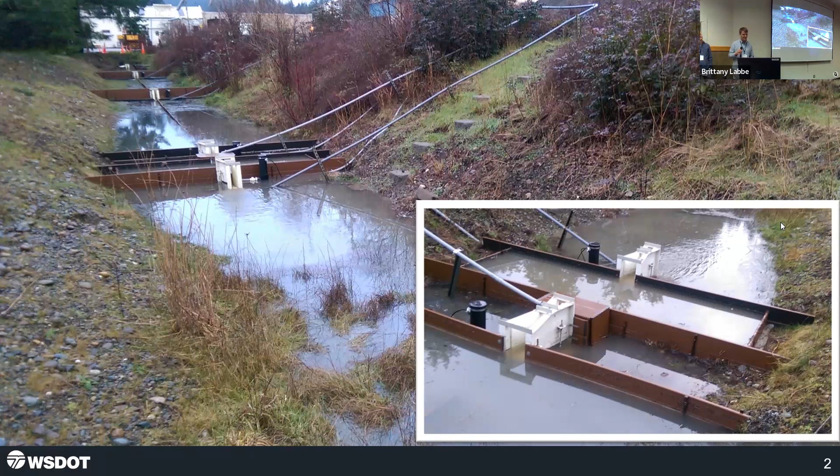This is Fun with Swales. I'm Chris. We're going to kind of talk about the last 7 years of not so much the actual studies, but more the study design and kind of the things we've learned on how to study swales.

So WSDOT was tasked to study bioswales about 7 or so years ago, and we came up with a design, we built it, and we started getting data, and we started learning kind of how the swale operated, how the design was going to operate with our study. And after many lessons learned, this exact same study, which started off looking like this, now looks like this. Same study, but this is ultimately what we ended up having to build to capture the data we needed.

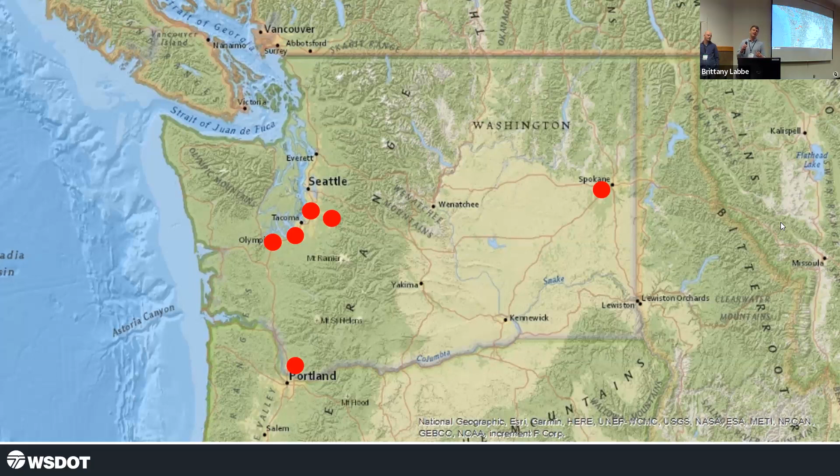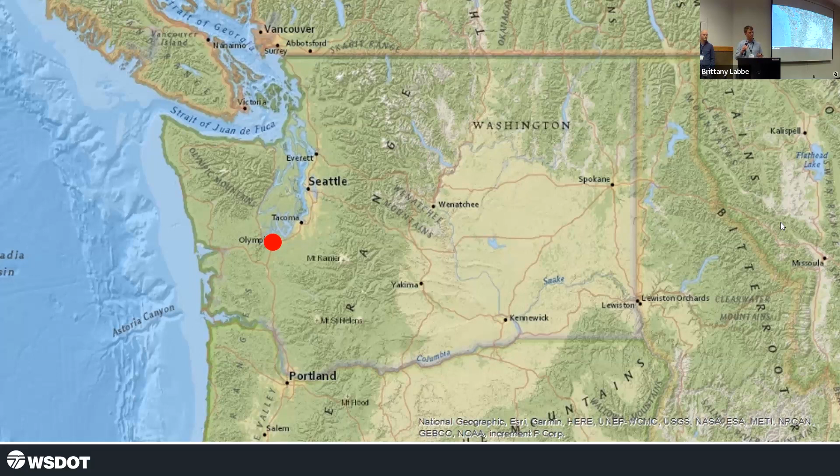So over the next few minutes here, we'll talk about how we got from this to this and the fun and painful lessons we learned. So I'll start off, most of you are probably familiar with this. This is Washington State. The 6 dots there are the swales that we have either current studies on or have had studies on. We're going to focus on this one. This is called Mottman. It's right at our office. So it made it easy to do lots and lots of spot checking, and we could really keep an eye on it.

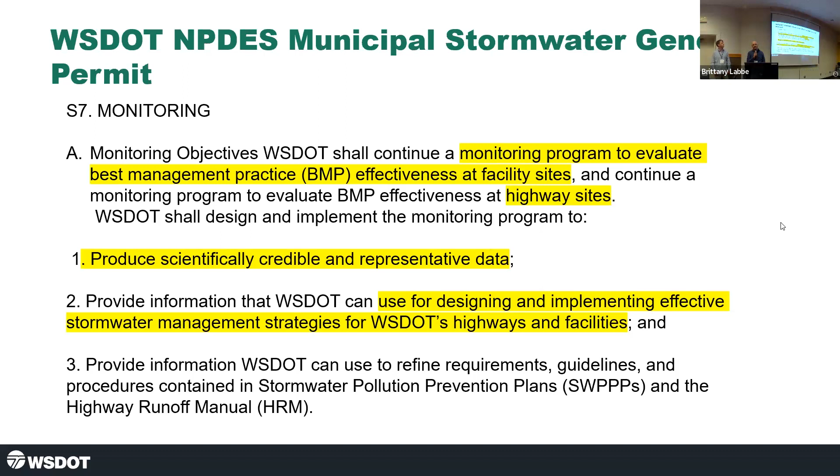So I'll take over. Why do we monitor? Well, because we love stormwater and we love tracking hydrology and creating spreadsheets and all that fun stuff, but also because we have to. WSDOT's permit requires that we have a monitoring program to evaluate BMPs. We want to produce scientifically credible and representative data, and they want to use that in the Highway Runoff Manual if possible. And we go by the TAPE program guidelines.

So these are just our general storms that we would target. We need 0.15 inches of rain, 10 aliquots minimum sample per composite jar. We like to get a dry period of 6 hours or more if we can, and we need to capture 75% of the storm's hydrograph.

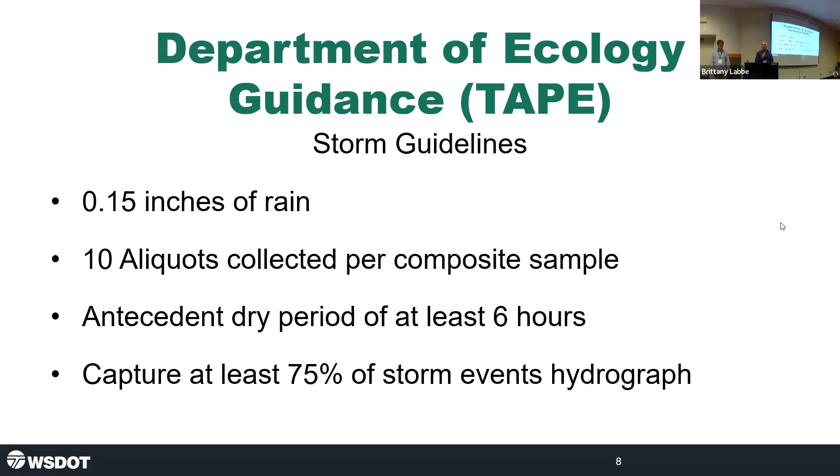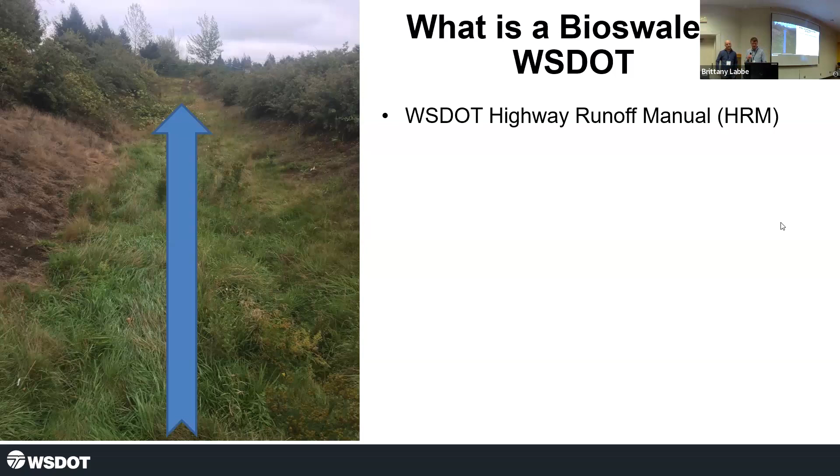Back to me. So what does a bioswale mean to WSDOT? So we go with the Highway Runoff Manual definition. So you're going to have a longitudinal slope of 1.5 to 5, nice gentle slope, max water depth of 2 to 4 inches, and a bed width of 2 feet to 10 feet. Minimum length of 100 feet. There you have a WSDOT bioswale.

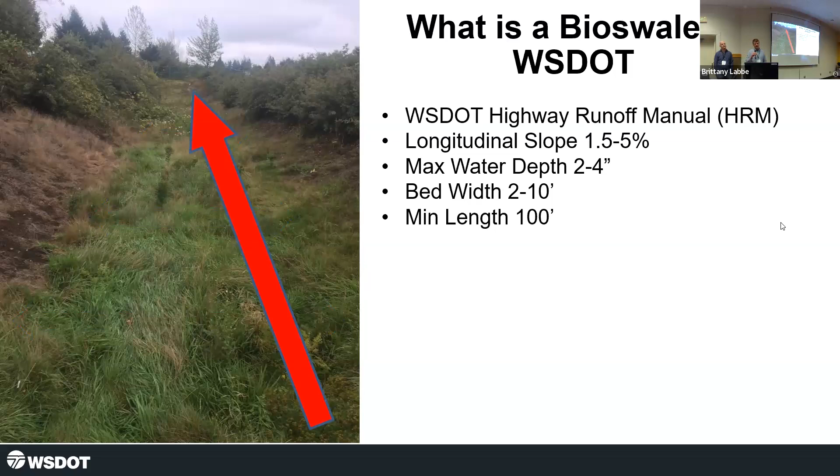To measure our hydraulic information, we use what was called FTS. Between multiple corporate mergers and takeovers of companies, I have no idea what the current company is called, but we use a program called AutoCaller Plus, and it allows us to have telemetry data and download data, so we can actively watch the site as it's sampling. So we can watch the hydrology numbers, and then we get a data download as well to get a really dense data set when reviewing it.

The Ubicom, we actually use that. We can do the same thing. We can get instant results back if we're looking at something that isn't in that hour time frame. If I want storm event information, I don't want to wait, I'm impatient. Or we can actually send information to it. So we can set them up remotely to sample. We can send sampling thresholds and other information to the site that way.

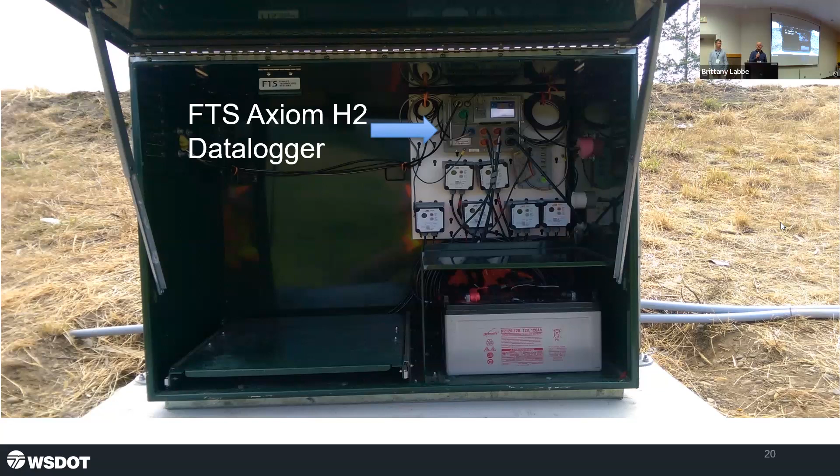It's their Axiom H2 data logger. You got the battery, go back a second. You got the battery in there, all kinds of different connections to some equipment that we actually don't even use anymore. So as we were saying, this is the original swale design.

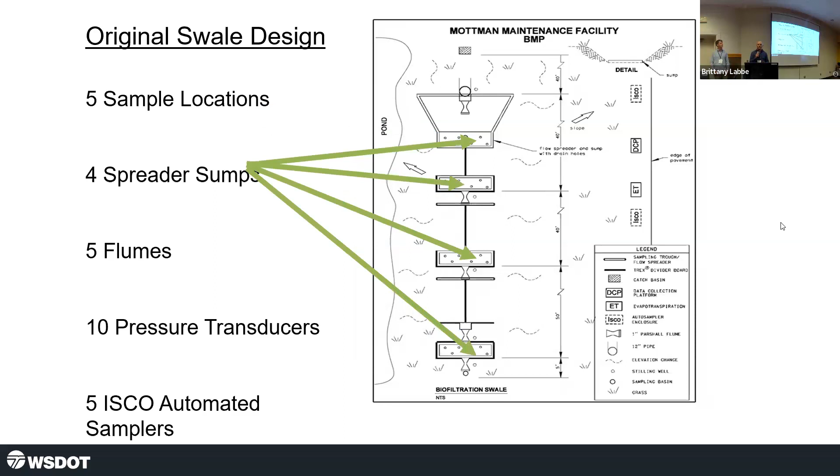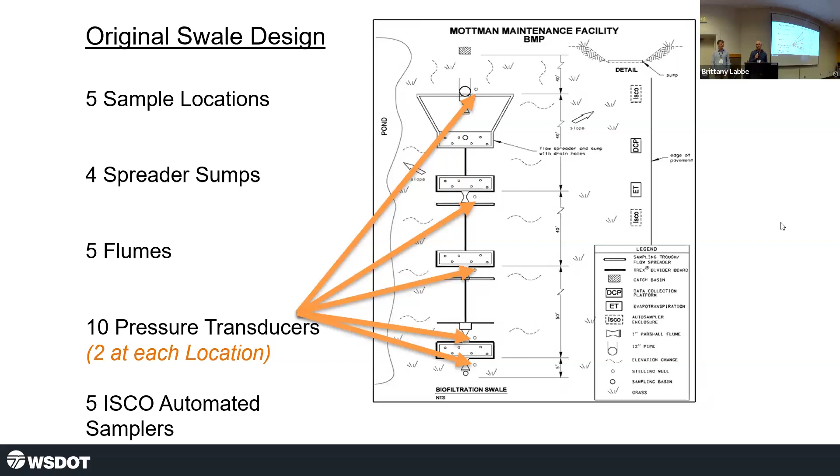And so it had 5 sample locations from the influent all throughout the swale. At each of those locations in front of the flumes were spreader sumps. And then there you have the 5 flumes. And then for the stage measurement at each location, there were 2 pressure transducers, so 10 total. And then each station also had an ISCO automated sampler. So as you can see, that's a lot of stuff going on there.

And for sampling purposes, that could cause problems where any of these things might go wrong at one time, and then it kind of ruins your event. Maybe you'll get the first and third sample location, but there was something wrong with the PTs reading incorrectly at the second. So we kind of had to figure out a better way to do things.

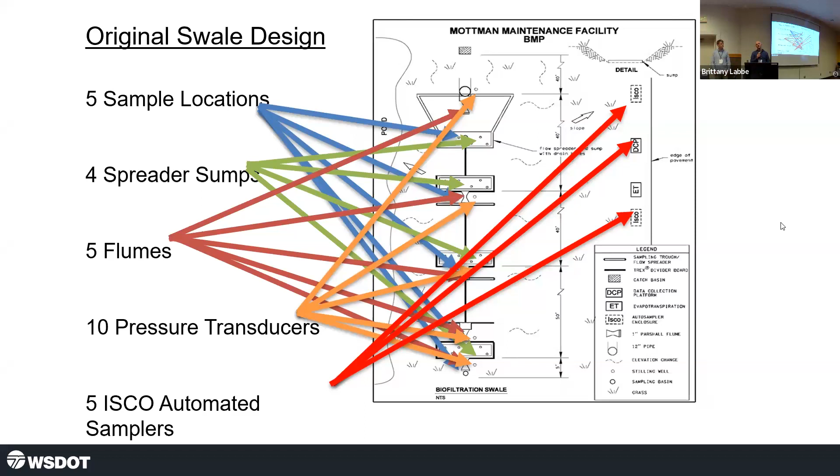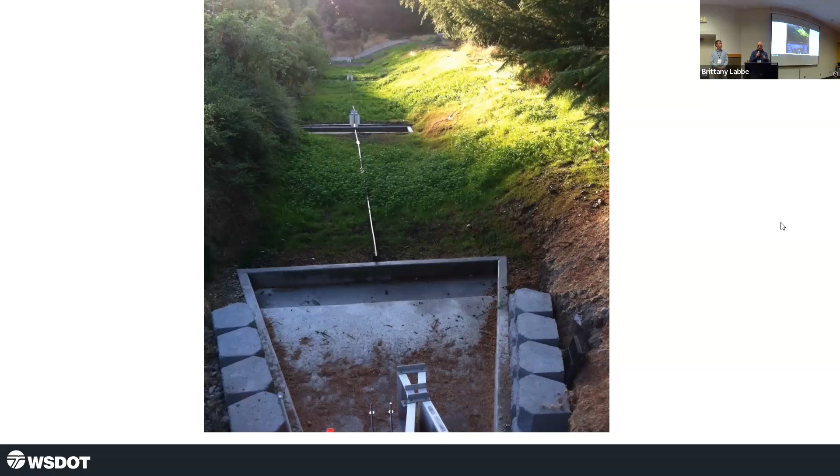So this is a beautiful picture of the original site. As you can see, this is looking down from the influent there. You can see all the little spreader sumps down through the end there. And this is what it looked like, as Chris said, after the first event. So yeah, we got it all set up and we're like, great. And then the first event comes and we look at the swale and we're like, that doesn't look like a swale anymore.

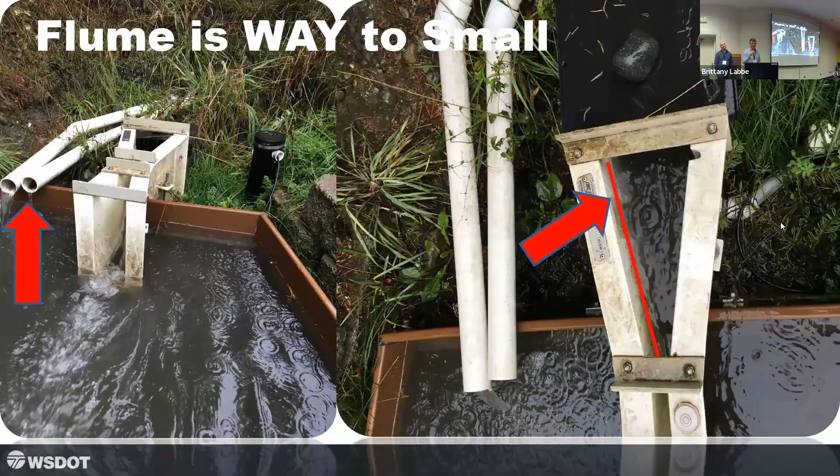So the first thing we learned is that our flumes are way too small. In this picture, you can see we have a bit of a bypass to get the excess water around the flume because there's too much water coming in. So that's water we're not accounting for hydraulically. And on the other picture, you can see that line, we're at the top of the flume. So in that moment, we were capturing all the water, but any more water at any more intensity, we're overflowing the flume.

So we did some math with our catchment area and rain intensity, using some of the data from the smaller storms. And we said, all right, 1 foot H flumes, that's bigger. So we got this built in and we're like, look at that. We're measuring everything, it's perfect. We got all the water captured, this is great.

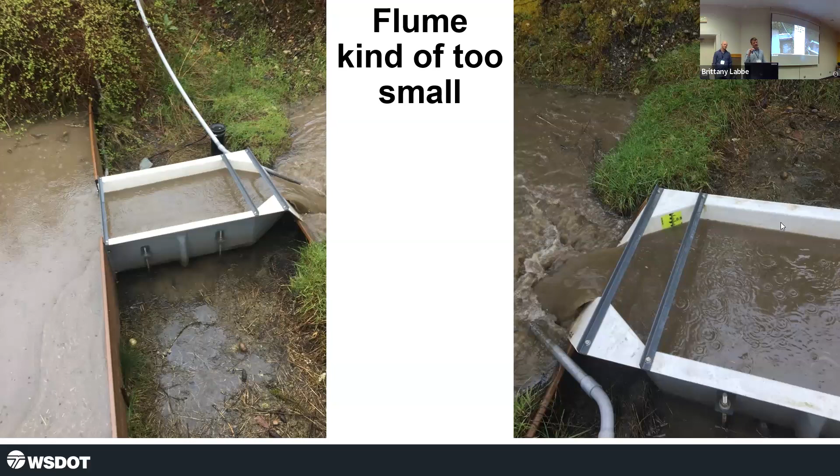And someone goes, hey, what was that thing about the maximum depth of water in a swale? Oh, 4 inches. Well, that flume is 1 foot deep. So if you're backing up the water so it's a foot deep and it's only supposed to be 4 inches, are you still measuring a swale? We thought, no, probably not anymore. So again, back to the math.

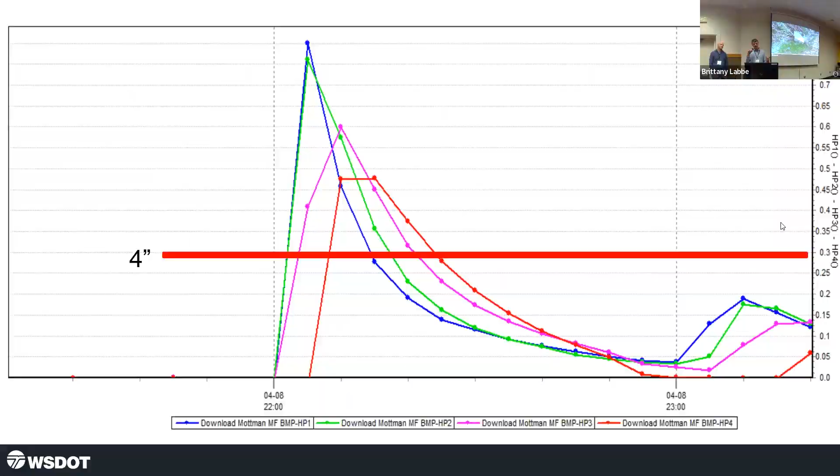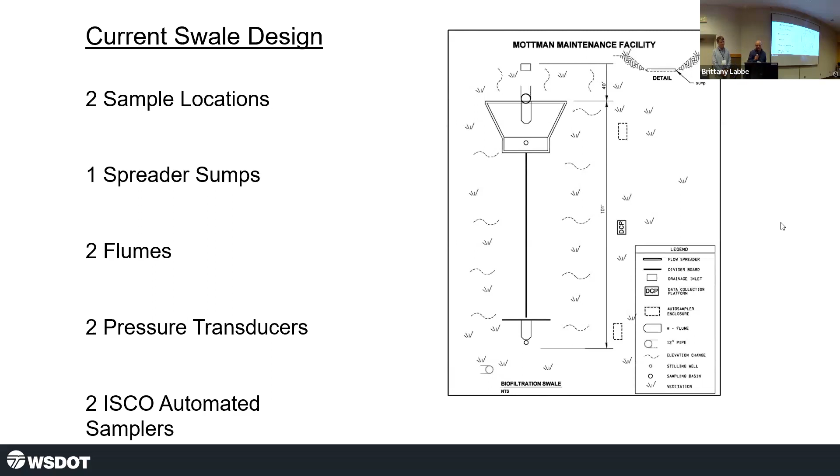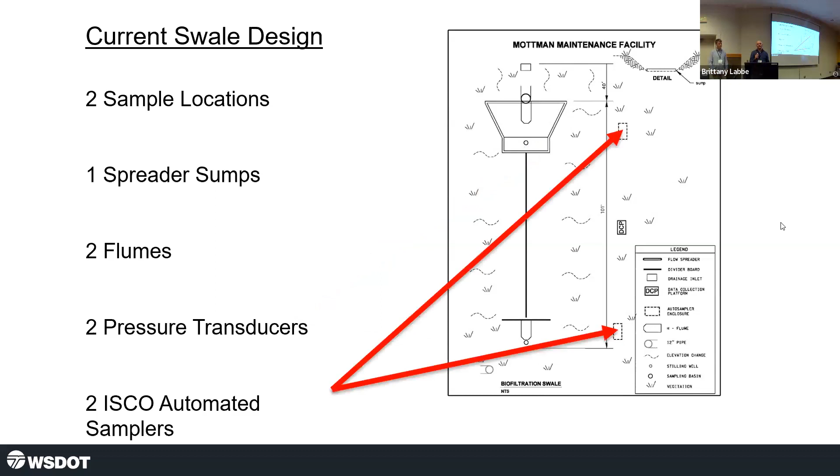So then, as Chris was talking about, this is the current swale design. If you remember the first one, a lot was going on. Here we have just the 2 sample locations, the influent and effluent. We got rid of everything in the middle. We have 1 spreader sump just after the influent flume, a flume at each location, and 2 pressure transducers, which I'll get to in a minute. There used to be 2 at each location, but there's only 1 at each now. And an ISCO automated sampler, so just 2 sample locations, a lot less going on, and we've had much greater success sampling, which we'll talk about later.

As far as I was talking about the PTs, on the left-hand side here, it's our old setup. As you can see, off to the side of the flume there is a PT stilling well. We had 2 PTs in there, and it would connect to the flume, and as water came through, it would read the stage for us.

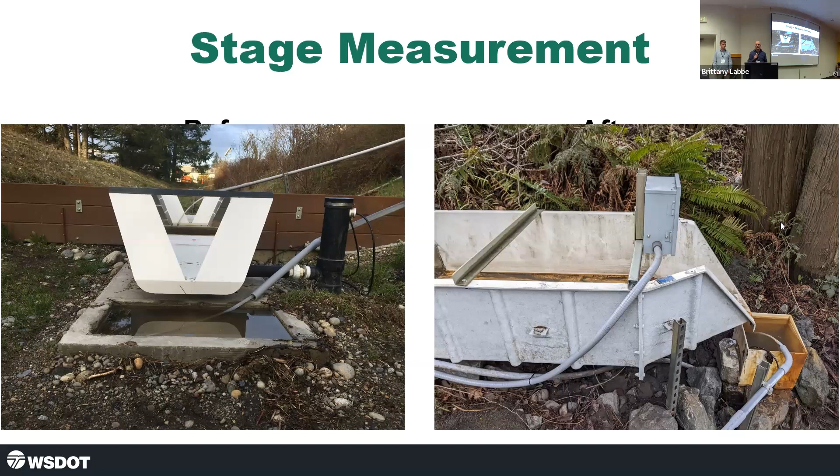But just probably in the last 2 to 3 years, we've switched over to just radar measurement, and it's worked out really good for us. We tested it for a year at a different site and went ahead and went with it. And I mean, we've had pretty great results with it. Here's some of the pros and cons of each.

The PTs, the sediment could easily clog up in some of the holes in the flumes we used, and then they wouldn't read accurately. Kind of required more maintenance to clean out the stilling well. I feel like we're always taking them out, vacuuming them out. A lot of sediment would get in. They needed to be re-zeroed kind of frequently, and in the winter they'd freeze up sometimes. Even though we put those stilling wells in the ground, it could still kind of freeze, thaw, could kind of mess with them a little bit.

The radar can actually just read the sediment in the flume. It requires less maintenance. The readings, once you clean the sediment out, it pretty much just goes back to 0. I mean, we zero them, but I don't even think it's necessary. And the data can be corrected easier.

So for instance, there'll be times I'll communicate with Chris that, hey, this flume's reading such and such amount of sediment in the flume. And if it's not a lot, and we know that the water volume will probably exceed that, he can actually go and do a little bit of correction if we can't get a field member out there, a storm's coming and we really want to go for it.

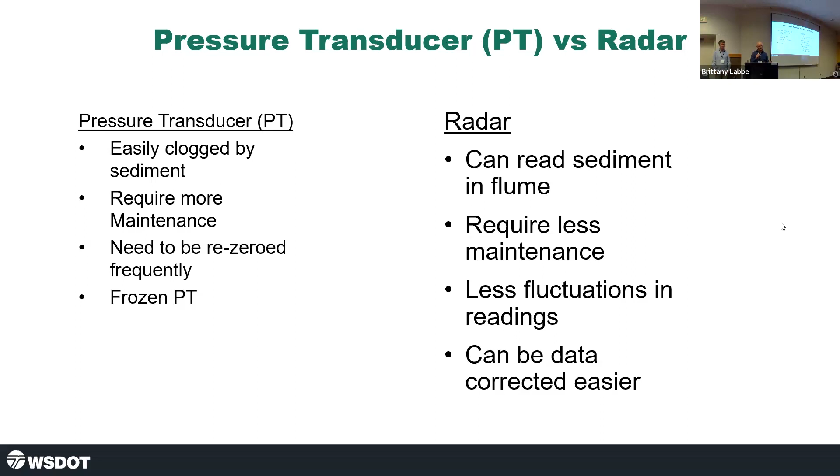So now we'll turn into, like, we took care of the construction issues, all the stuff that was in the flume, and we really simplified it, and it worked out great. But then we had to get into the sampling. We wanted to be successful for that also. And so just for background, prior to the swales, we had only done really roadside embankment studies.

Not a lot of flow. When it does come down the embankment, it's slow trickling in. So our most concern was getting enough volume. And so in the swales, it was actually completely opposite, which we learned, it's coming through fast, you're getting plenty of volume to sample. So I'll start with, what's a sampling threshold?

Well, the sampling threshold is a number with volume in liters that we plug in that's going to pass each sample point, and that triggers, the logger will trigger that ISCO to say, hey, if you said the threshold was 1,000 liters, after I read 1,000 liters, I'll pull that first aliquot for your composite.

So for instance, our jars hold 37 aliquots. I should have done like 37,000 liters in the threshold of 1,000, but so in the past, we always wanted the full jar, but we learned something when we started to sample these swales. Wait, no, I didn't skip one, but here's what I would do.

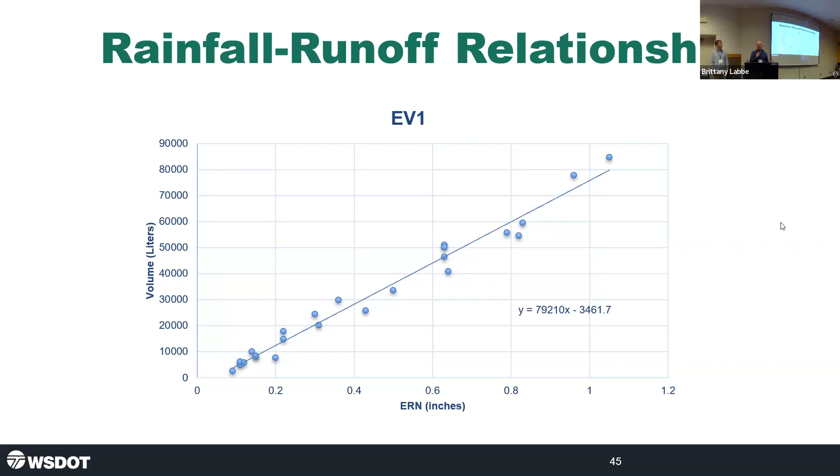When I said we like spreadsheets and graphing, we would look at the volume, different rain events, and we would create a relationship, and oh, this great formula right here. I can use this, and I can pretty much figure out a threshold, give or take, that's going to work out for the sampling event. It worked great on the roadside embankments, like I said, because the cadence is slow. And then I did it for all the other site locations throughout the swale.

And so this is what we want it to look like. The volume is the pink line, and the sample numbers are the steps in the blue line. So we want it to be kind of evenly spread out, and it looks great. That's what we would hope for.

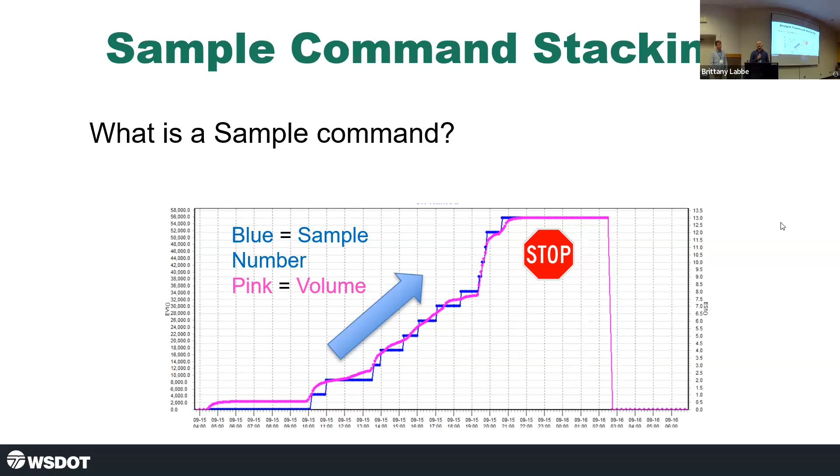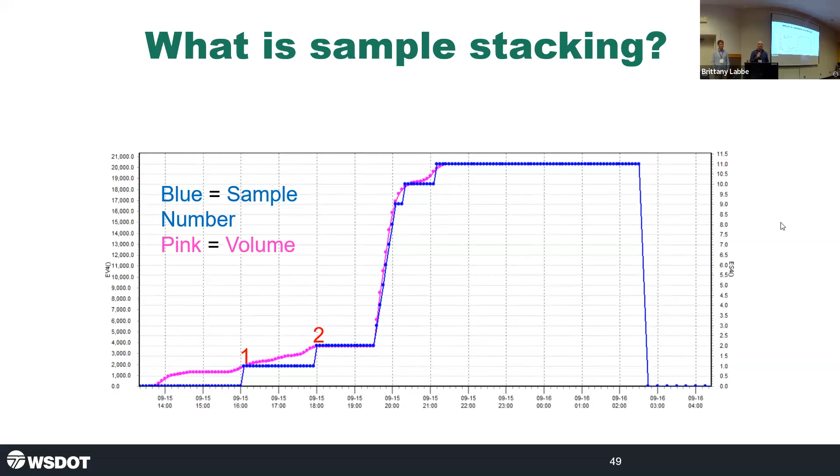But what we found out is that you put in a threshold for these swales, what would happen is the storm would start off slow, volume would come in, our threshold would hold up really well. We get the 1 and 2 sample there, nicely stepped up. Well, a ton of volume would come through, and the logger would say, wait a minute, your threshold was 1,000, I just got 10,000 liters. That's 10 samples.

It would send those commands to the ISCO, and the ISCO can't keep up. It can't sample that fast. So we refer to it as sample command stacking. The ISCO would stack those commands in its memory and then just start pulling every 5-minute cycle that it had. And so that threw off our coverage of the event. We no longer were really getting that 75% of the hydrograph anymore. We were missing volumes. And so it wasn't working out.

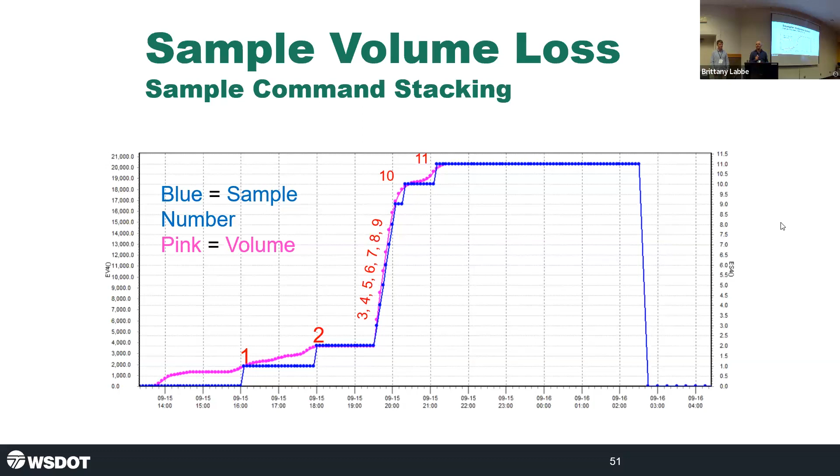As you can see, it started to climb up. We got a bunch of stacking, and then it slowed down at the end, and it kind of resumed its normal sampling that we would like to see. So how did we fix this? Well, as usual, it's all just looking at the data.

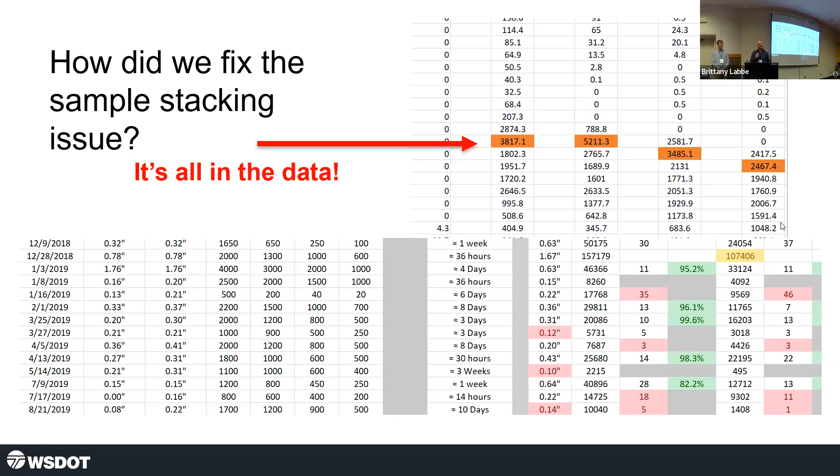What we did is if you really looked at the data in 5-minute intervals, I could see the maximum amount of volume that would flow by each sample point for a certain event. So I knew that if the maximum amount of volume in any 5-minute interval was like the 3,800 that's there, then if my threshold's far lower than that, I'm going to get that problem again. So it was all just looking at the data, and I'll let Chris talk about how well it's worked out for us. Yeah, it's worked out nicely.

So from 2017 to 2020 with the old setup, all that equipment, it's like a bridge that has multiple failure points. Anytime one of those things failed, we had to reject it. We had 22 attempts with 4 successful events. And then in 2020, things slowed down and we weren't able to go out in the field for a while, but we started back up in 2022. And in only 6 months of sampling, and we've had a little bit more since this presentation was created, we had 7 attempts, 5 successful events. So we went from an 18% success rate sampling events to a 71% success rate.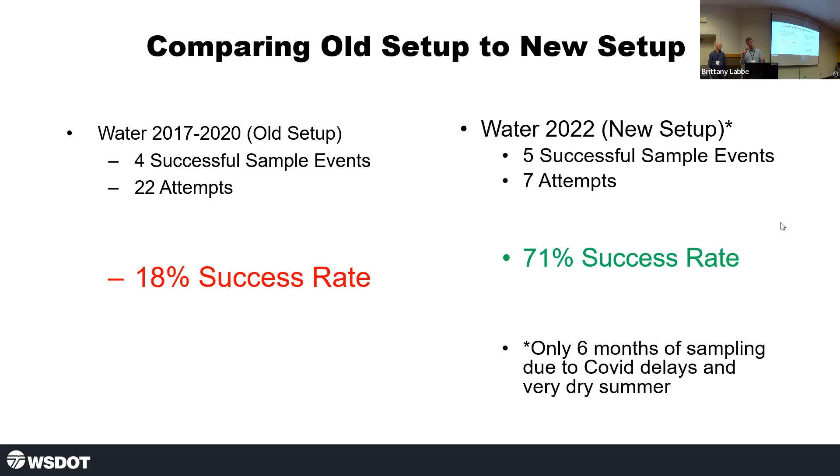And then try to remove as many failure points as possible. We don't need 2 pressure transducers. We can use 1 radar. We don't need 5 flumes. We can use 2 flumes. And then just get as much good hydraulic data for each site and each location. And then just keep it simple. We were just super ambitious with these designs and these ideas. And it came down to, you just can't get that. You've got to really go for the simplest plan you can do, get that, and then step up your ambition as you go.

As Chris said, when we get together in a room, we still tend to want to throw out these great, really exciting ideas, and we kind of have to rein ourselves in because of the things we've learned that it may not work for monitoring. It sounds great, and we want to treat all these great things, but for monitoring, the more complex it is, the harder the results are to get. So that's it.

Yeah, and one more: now that we've really figured out how to sample these things and how to study them, we can really move forward in applying these to cool new studies. So currently we have a short swale study, a swale that's built smaller than the HRM specifications, to see if we still get the treatment levels of a full-size swale. We have a sediment basin swale that we're studying right now in Spokane, where the area gets tons of sediment, washes out the swale, silts it over. And so we put in a large siltation basin in front of it to see if that would fix it.